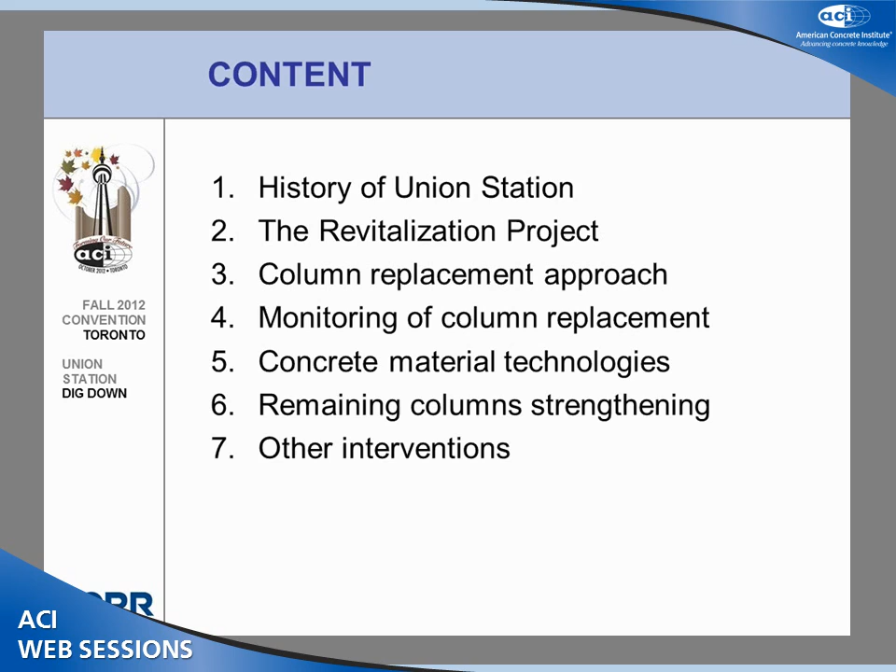I will be talking a little bit about the history of Union Station, and I will be talking about the project and what we are doing, and I will focus a little bit about the concrete material technologies that are involved.

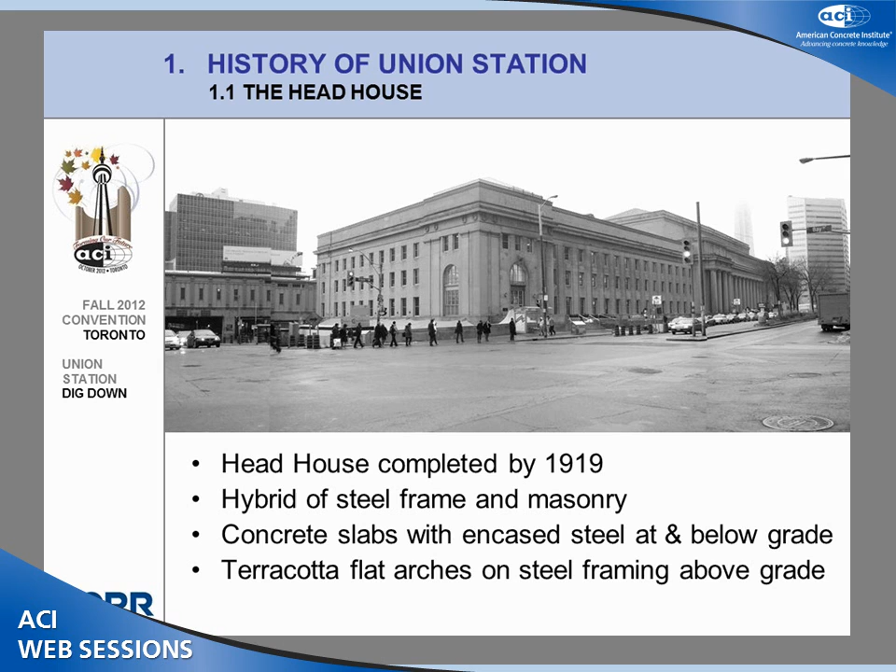What you are seeing is the head house of the Union Station. It was completed in 1919 as a fine example of the Beaux-Arts of the period. It is a hybrid steel frame and masonry that had concrete slabs on steel framing only in the ground floor and the basement. Above that, everything is composed of steel framing with flat terracotta arches.

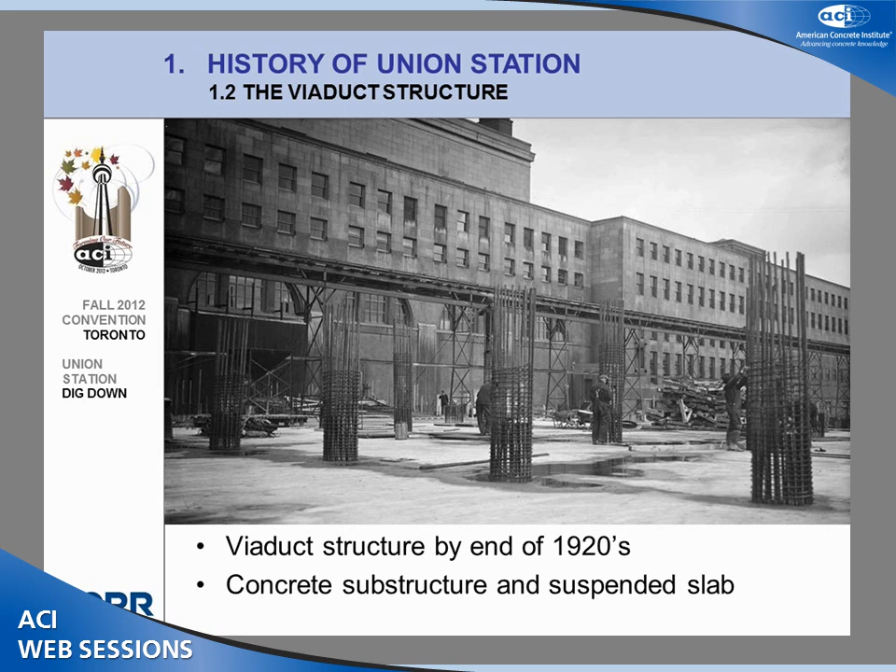Adjacent to this and just to the south of the building, which is the head house building, is a viaduct structure, which is primarily really a bridge that elevates the trains to the level of the concourse. This was built of a purely reinforced concrete structure. In fact, it was built almost 10 years after the completion of the head house, and that had to do with issues in decision making in the city of Toronto. Nothing that we have now, so this was only in the past, I guess.

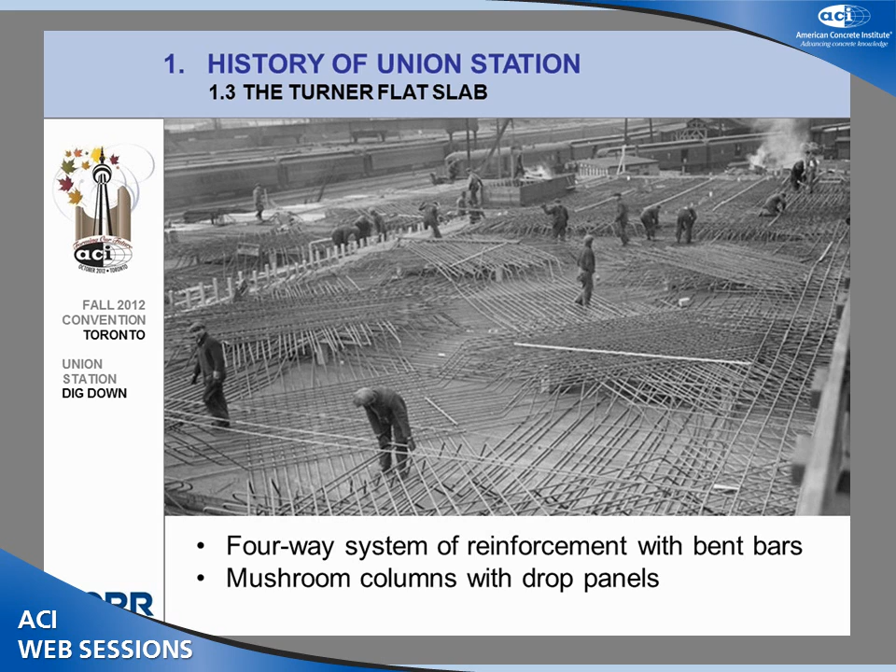The structure is a Turner flat slab, which has a four-way reinforcement system with bent bars, which are common of the period. It had mushroom columns and drop panels.

So the site is a heritage protected site and is one of the most significant buildings in Canada, in fact, in terms of its heritage values. We are doing a lot of work on the restoration of the building, but that's not the subject of today, so I will not be discussing that aspect of the project.

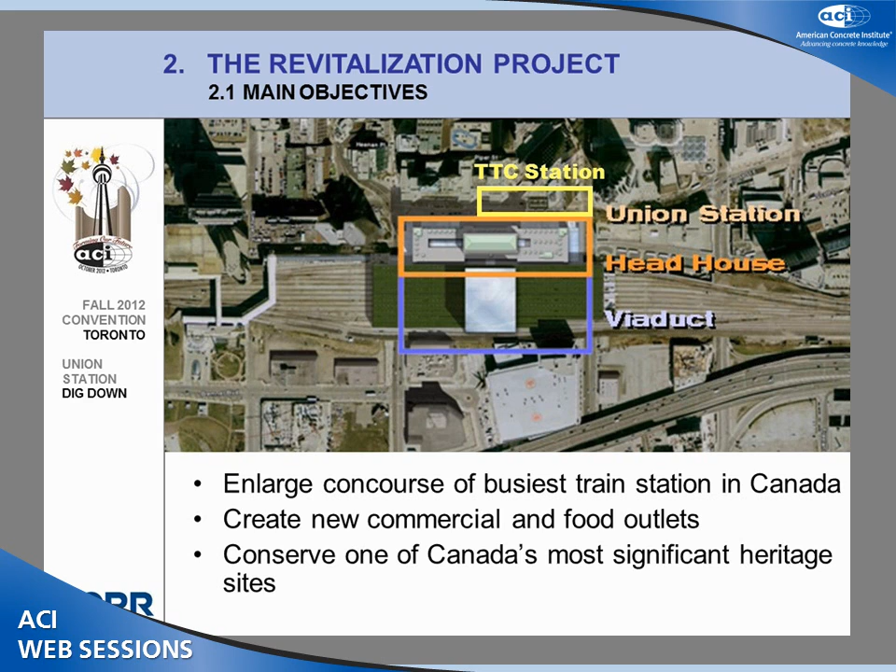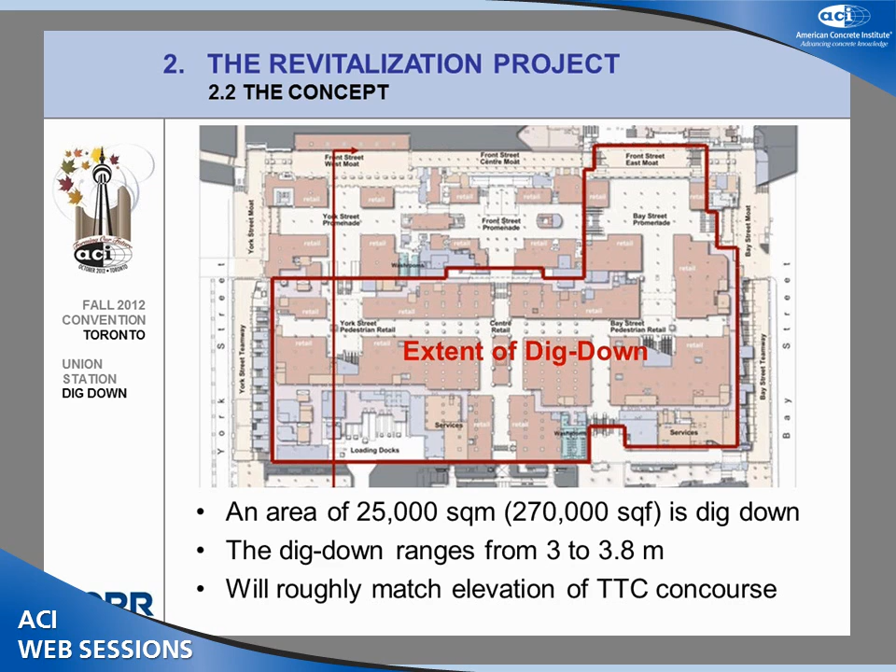What I'll be talking about is really the dig down, which you can see, which is basically the entire footprint of the viaduct structure, almost 240 meters long, as well as part of the head house that we are digging under, and the moat that surrounds the head house, and we will be at the same level as the reduced level of the entrance of the TTC station. So all in all, we'll be digging an area of approximately 25,000 square meters. Well, I'm talking in the past tense - in fact, the project is in earnest for a while, as you will be seeing.

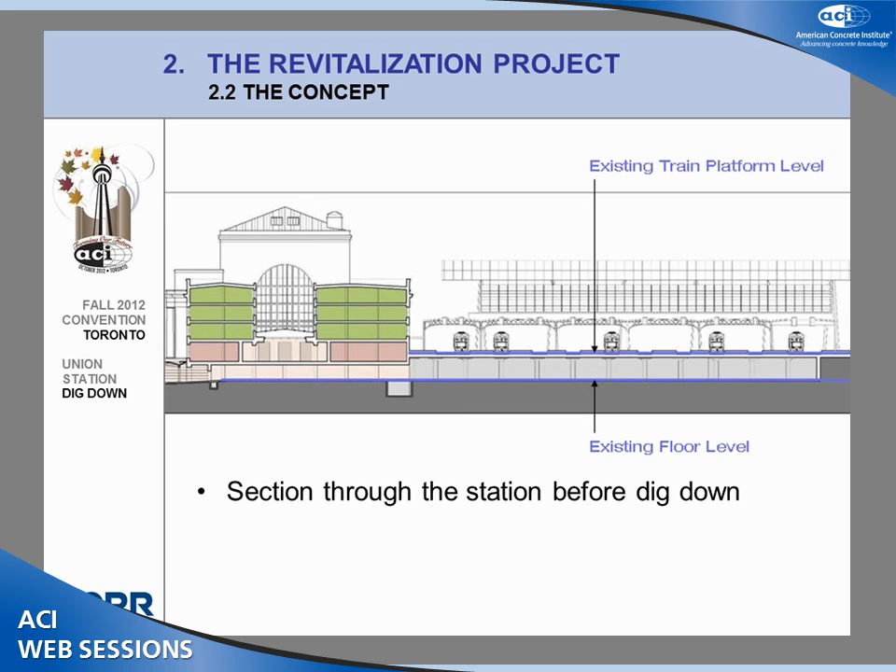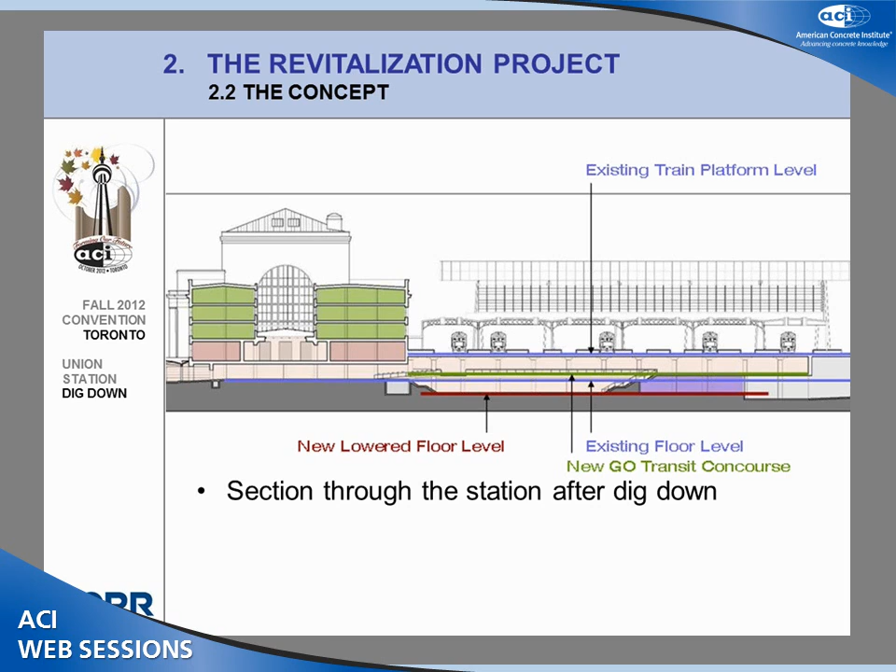This gives you an idea of a perspective in terms of a cross-section. The head house is to your left, the train shed is to your right, and underneath that is the viaduct structure. As we complete our project, we would have created a new retail mall below this structure, and we would have created a new concourse - really a new slab that would be sitting a little bit higher than where the current slab on grade is now.

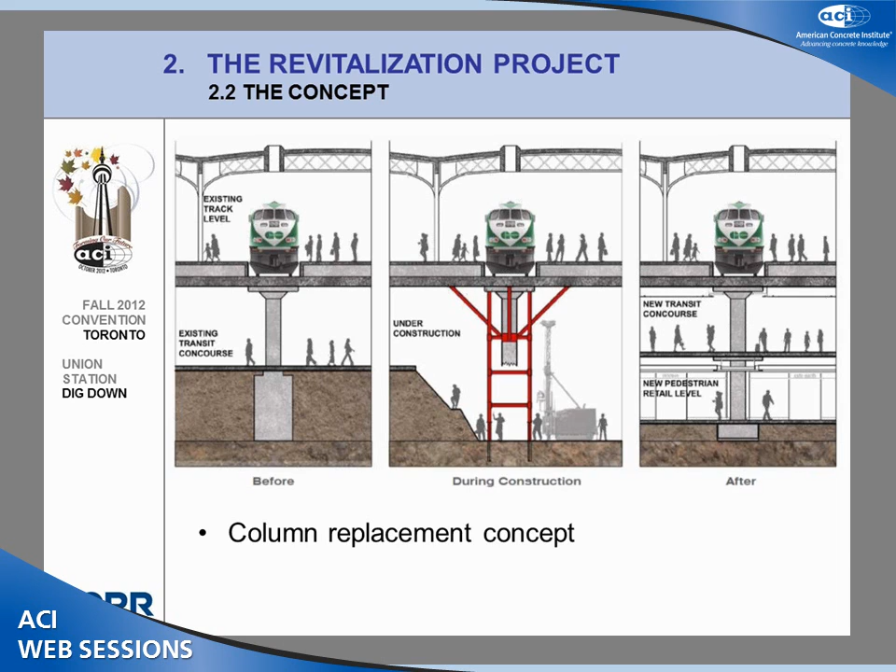The concept is explained in this slide. The situation before the intervention is that we have just this one concourse. We are going to be excavating, shoring the track slab, and then we're going to break the column, remove the foundation, and then cast a new column with its new foundation, and cast a new concourse slab.

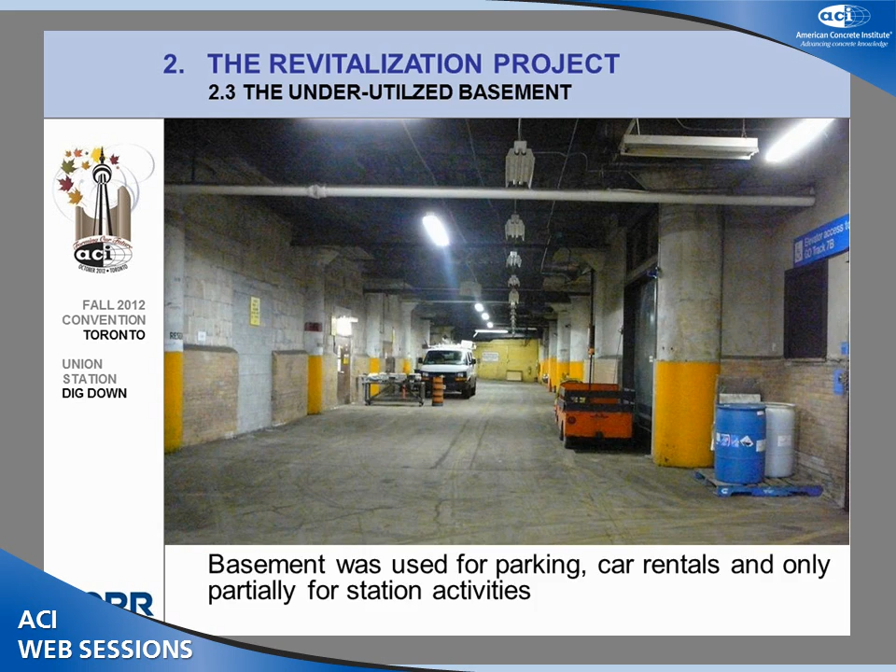The original viaduct structure was highly underutilized. There was some usage for it in terms of some car rentals and some maintenance, and a little bit of it was used by GO as part of the GO concourse, but that was even a very small part of the viaduct structure, so it was highly underutilized.

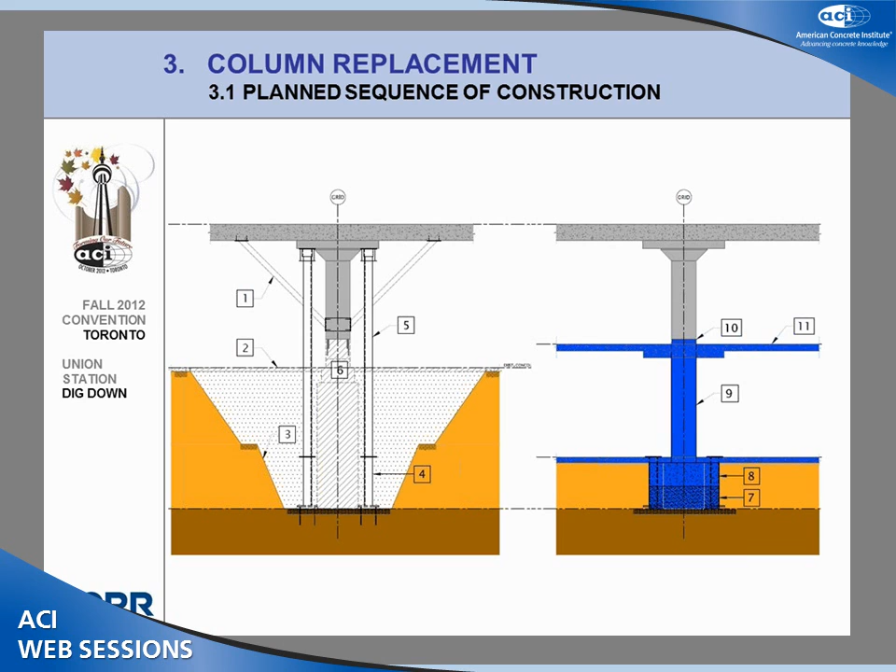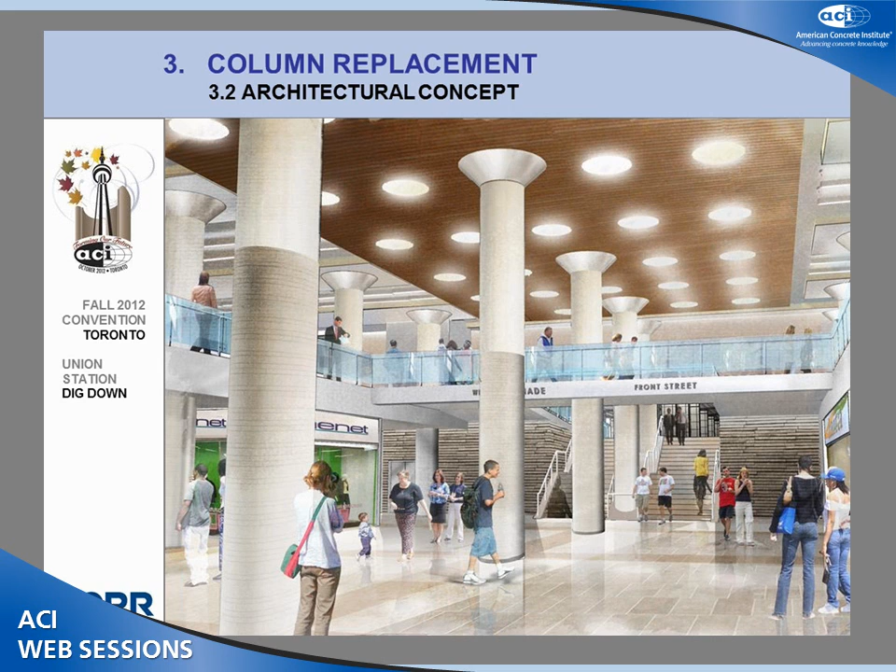This is again the same diagram, except it shows the sequence of what we are doing and how we are achieving it. I'll be going over this in a minute, so we'll see it as it's happening now. This is an artist's image of what we are expecting to see in a few years, planned in 2015. But you will see more of it before that, because it will open in stages.

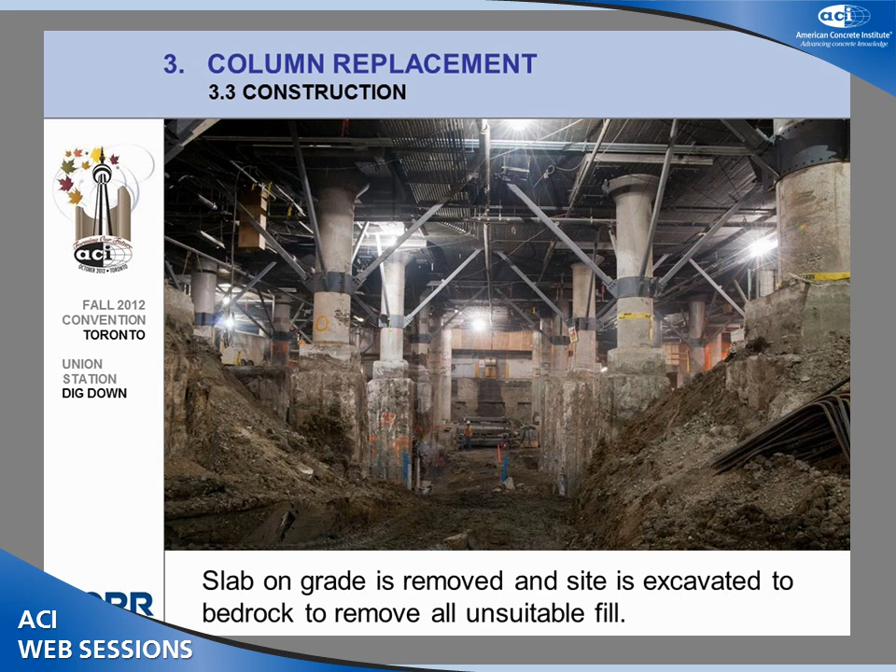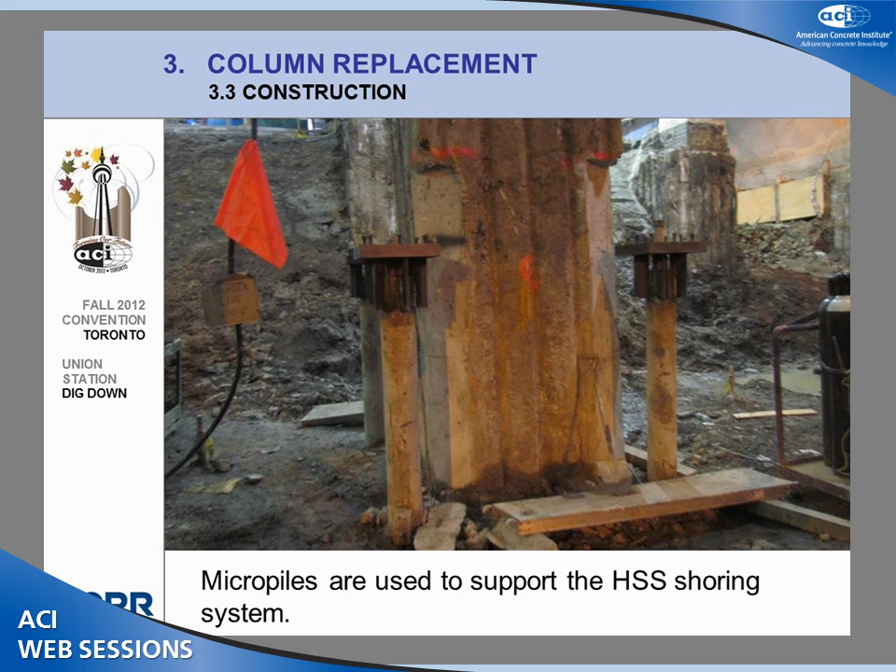This shows the dig down, which is basically the excavation, and you see these pedestal foundations that were supporting the track slab. To support the track slab, we had to support this on firm ground, and we supported the majority of those on micropiles columns that were socketed in rock.

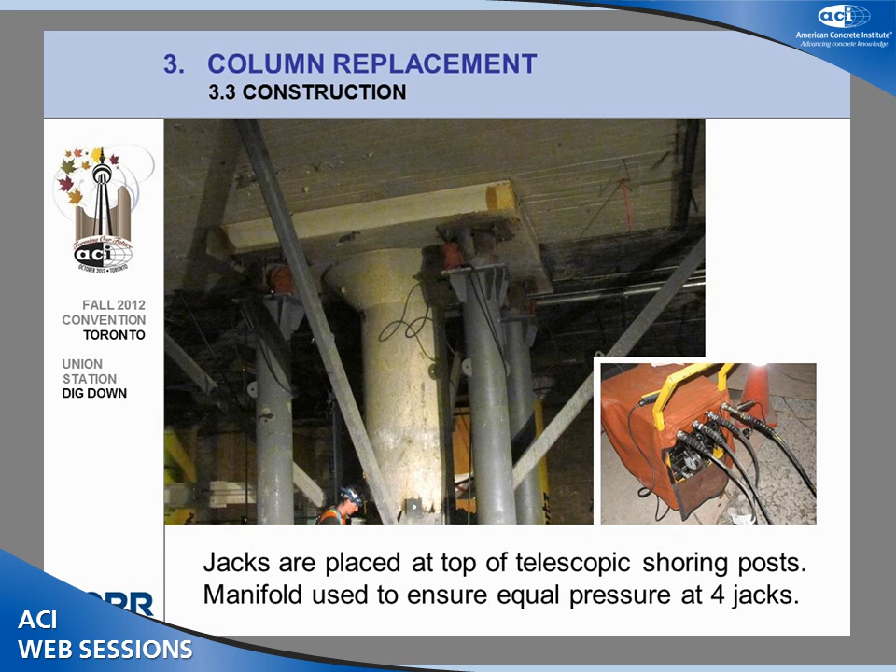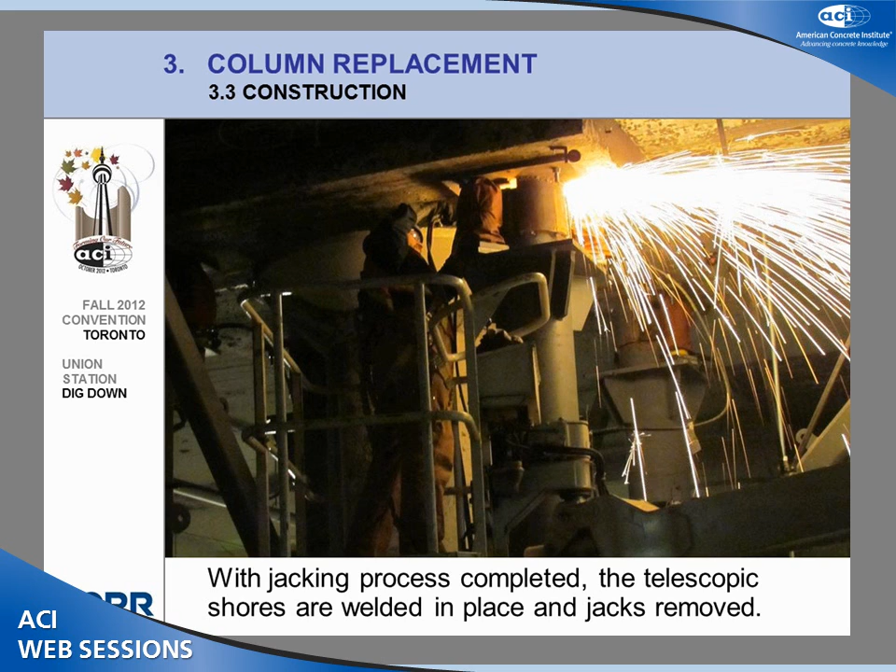As we mount these shoring posts, we introduce jacks, four jacks at the four corners of the column, and use a manifold system to make sure that the loading of the four corners of the column is uniform. There was a telescopic kind of post that we used, which had two shafts. Once the jacking is completed, welding would be performed so that the load is no longer on the hydraulic jacks, but rather on steel. Then the jacks can be removed temporarily until they are reinstated when we want to transfer the load back to the completed column.

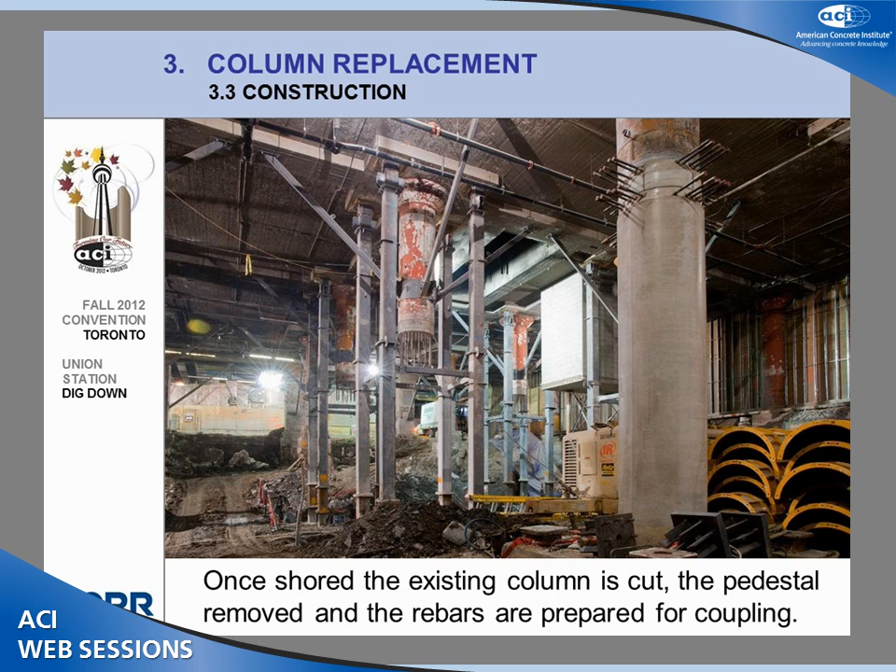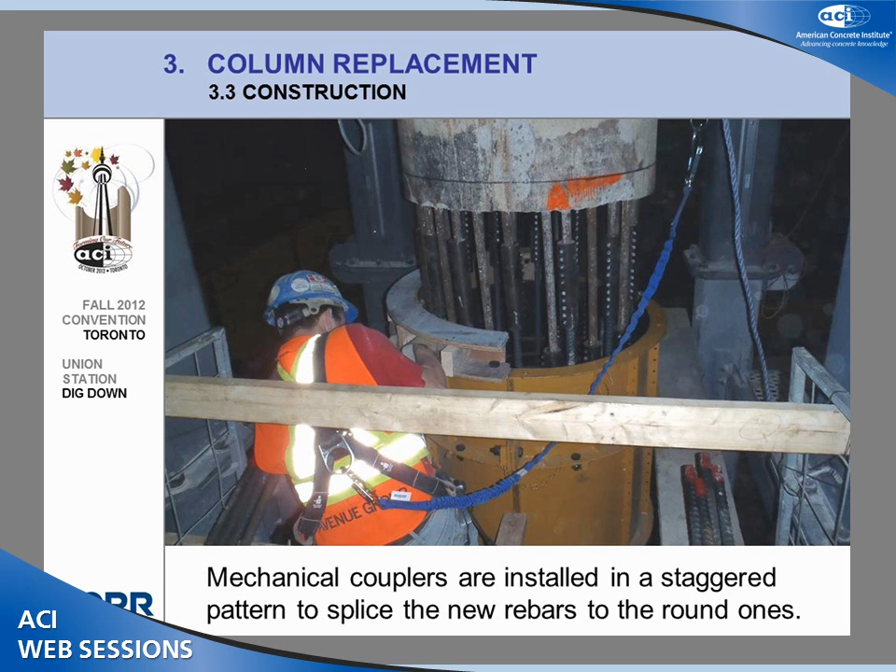This shows a snapshot of one column that has been cut, where the original rebars are exposed by chipping the concrete around. Couplers are introduced to connect the old round bars to the new deformed bars. We tested this to make sure it works, since these couplers are certainly not designed for the original round bars, so this was a different application. Indeed the failure happened in the steel round bars, not in the new steel bars, nor in the coupler itself.

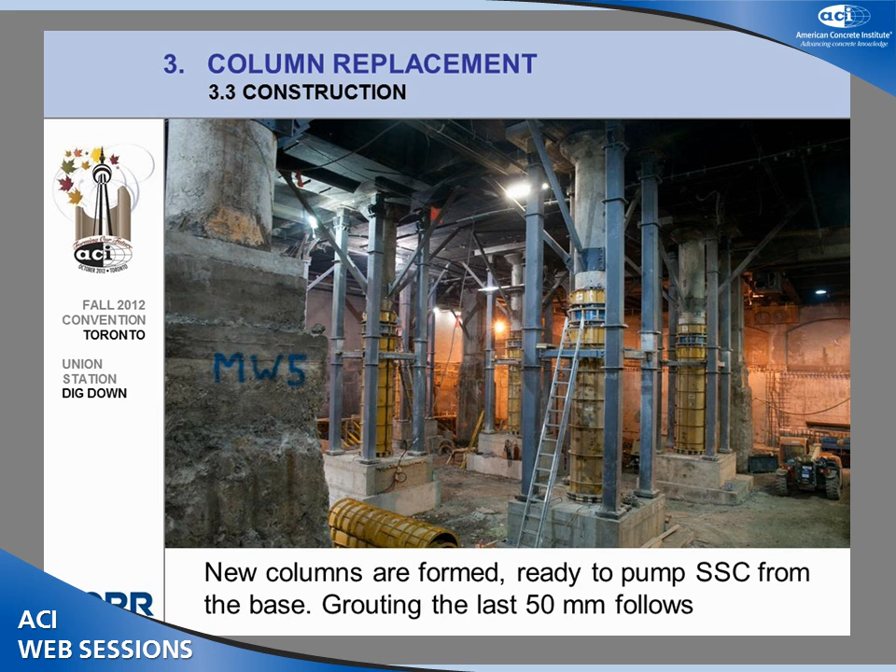This shows the formwork that's been done, and we would be pumping the concrete from below, done in two stages. The first stage is the majority of the column, and we just leave a 50 millimeter distance so that we can grout this, to make sure that we have a good part of the shrinkage that takes place along the length of the column before we grout with the shrinkage compensating grout.

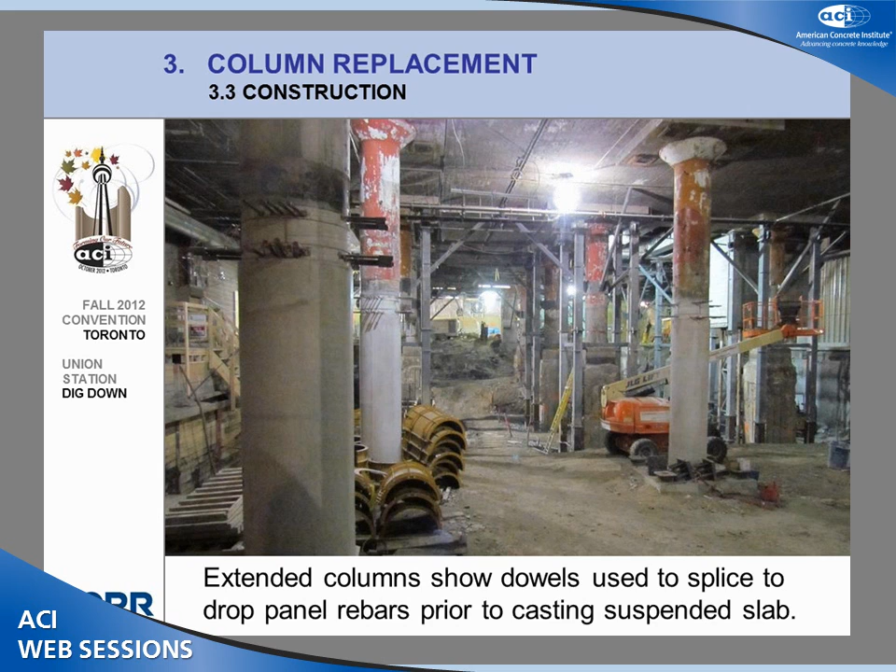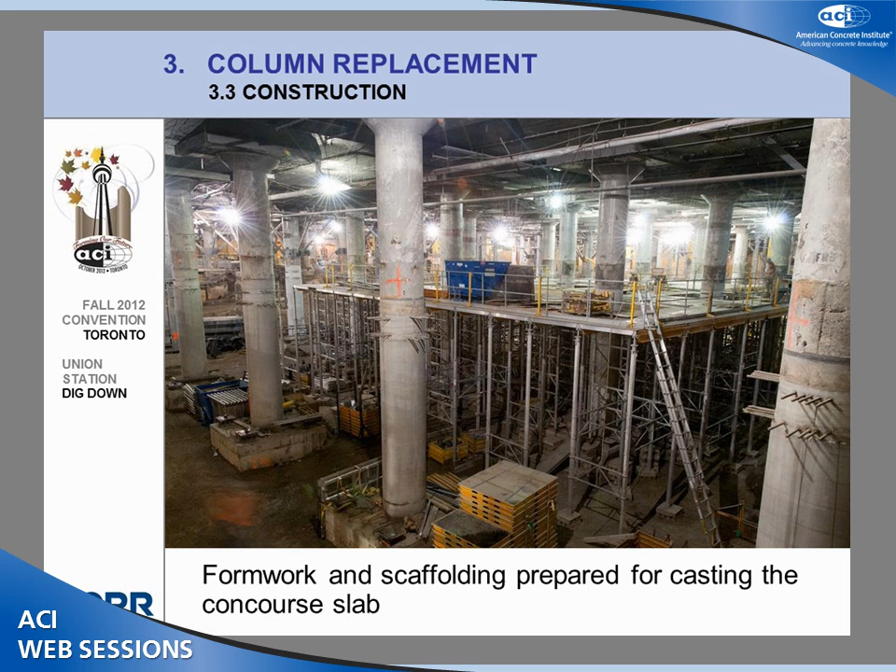This is an image of part of the completed columns, and as we then place the concourse slab formwork, you can see the dowels that are introduced in the columns with couplers that connect to the concourse slab reinforcement. This is the concourse slab as cast from below.

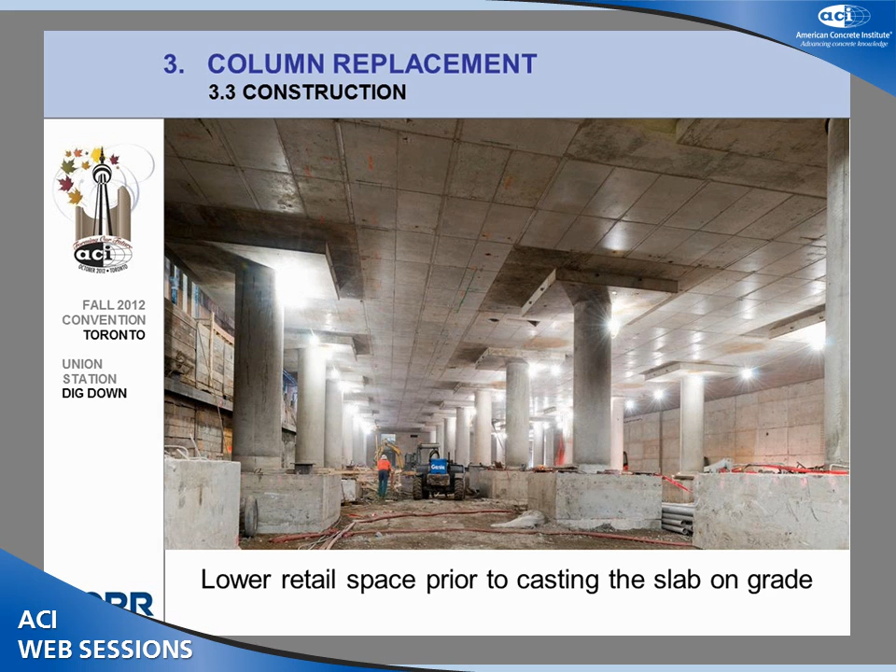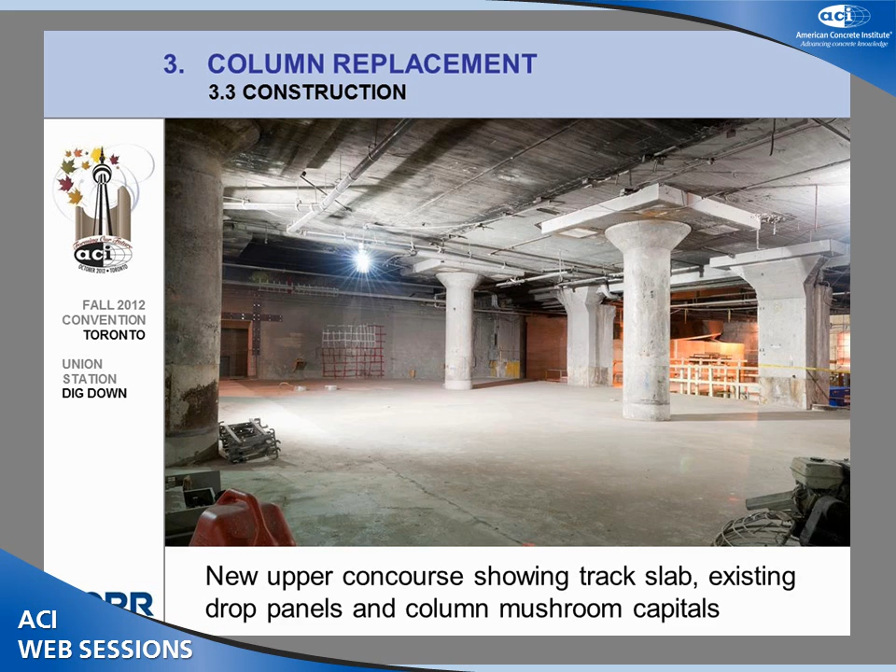We used the same system more or less that was used, except we did not use the column capitals, but had a flat slab with drop panels, and of course the slab on grade is still on top of the level of the foundations which you see. This is the concourse slab as seen from above, and it shows the original track slab with its mushroom capital and the drop panels.

We were asked that the train station had to be fully operational. There was no stoppage whatsoever, not even for the trial columns that we did at the beginning.

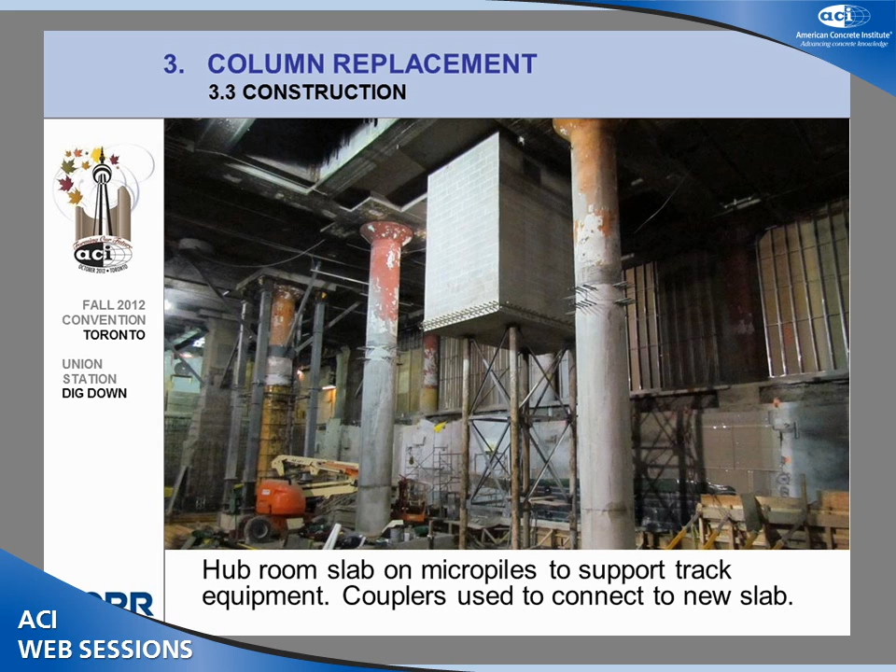Part of running the train station is all of the equipment, and we were asked to produce a room that would house the equipment and not have it removed at any time. So what we did is cast a slab on micropiles, then dug down below that slab, braced those micropiles, and had a platform waiting with all of the coupling, the couplers on those dowels to receive the rebars for the Concourse at that level.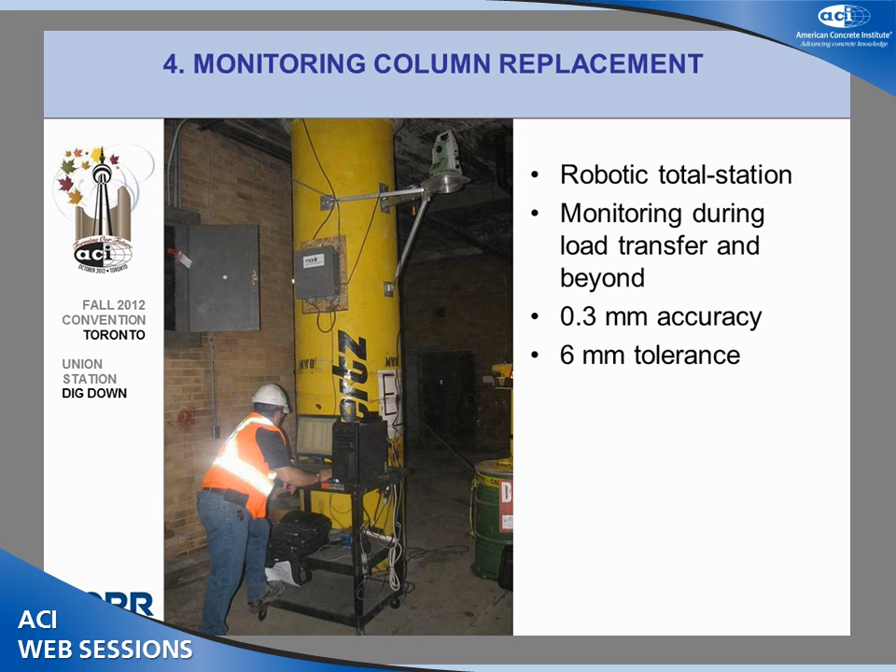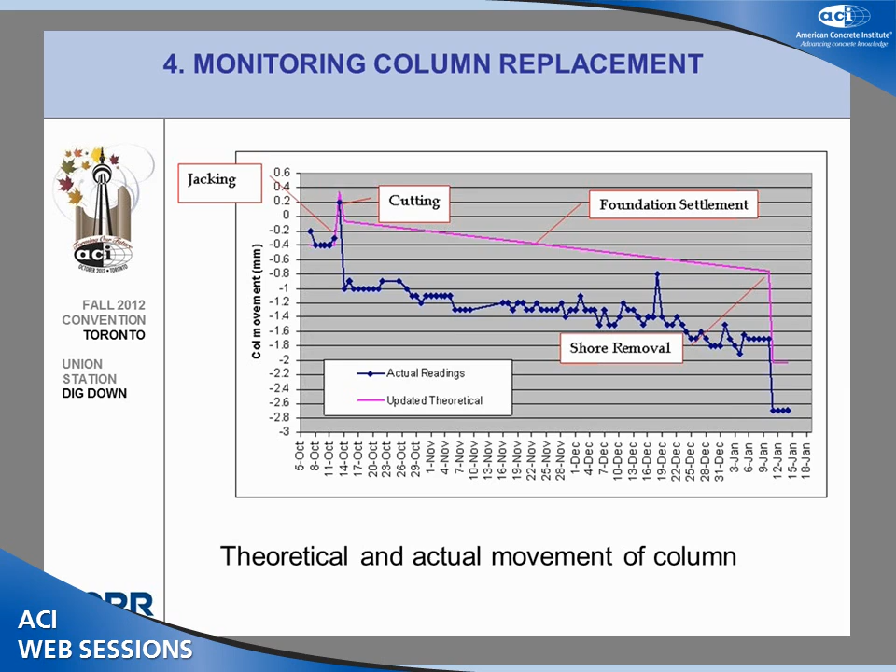We monitored the movement throughout, and required an accuracy of 0.3 millimeters and a tolerance of 6 millimeters. This is an example of the monitoring done by a robotic total station, where the movement roughly stayed within 3 millimeters, not really the 6 millimeters, which was the higher limit we had set.

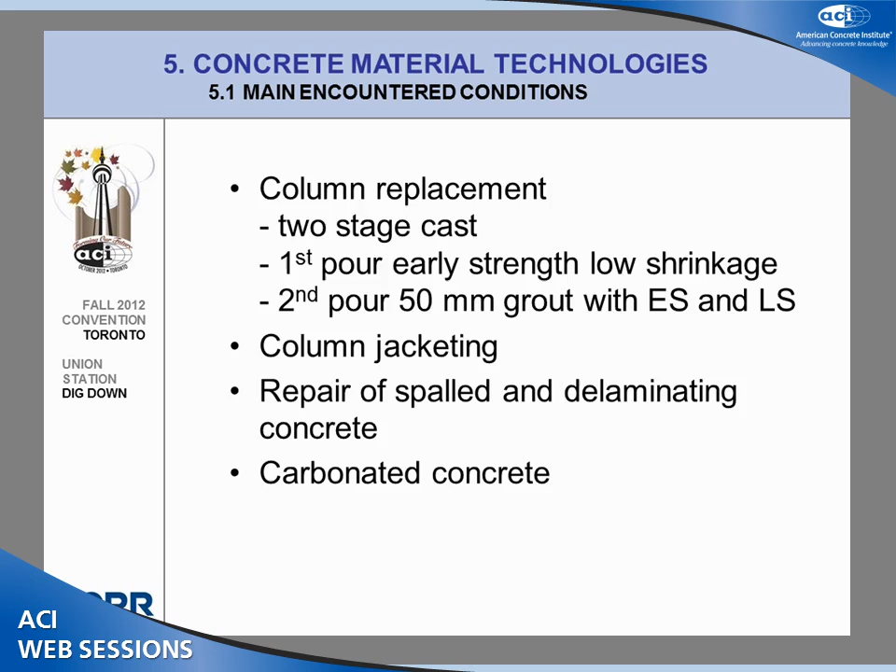As I said, there were two pours, and I'll talk a little bit about the concrete mixes that were used. There were other applications such as column jacketing and repair of spalled, delaminated, and carbonated concrete. Again, this is not the subject of this presentation, so I will only touch upon the main subject, which is the column replacement.

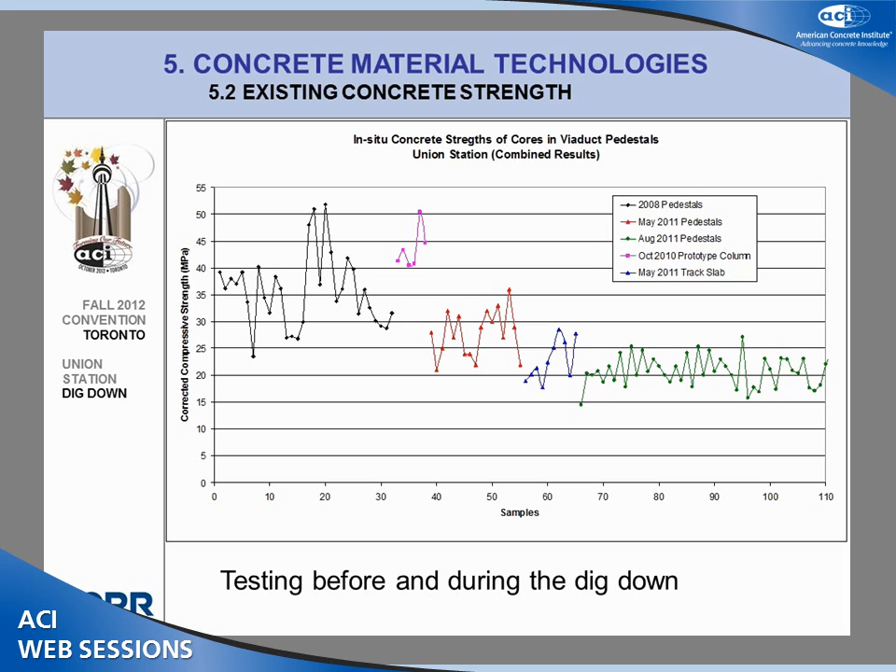Part of the evaluation is that we tested the concrete before we started, and then tested some of the concrete we retrieved from site as we proceeded. It is interesting to note that the concrete was on the whole significantly higher than what was specified originally, and one explanation was that perhaps the granular size of the cement at the time allowed a progressive curing for a longer period, so we had this growth of concrete.

Now, basically, we had specified... sorry, this is just to talk about the same point I made, that the concrete strength was significantly higher.

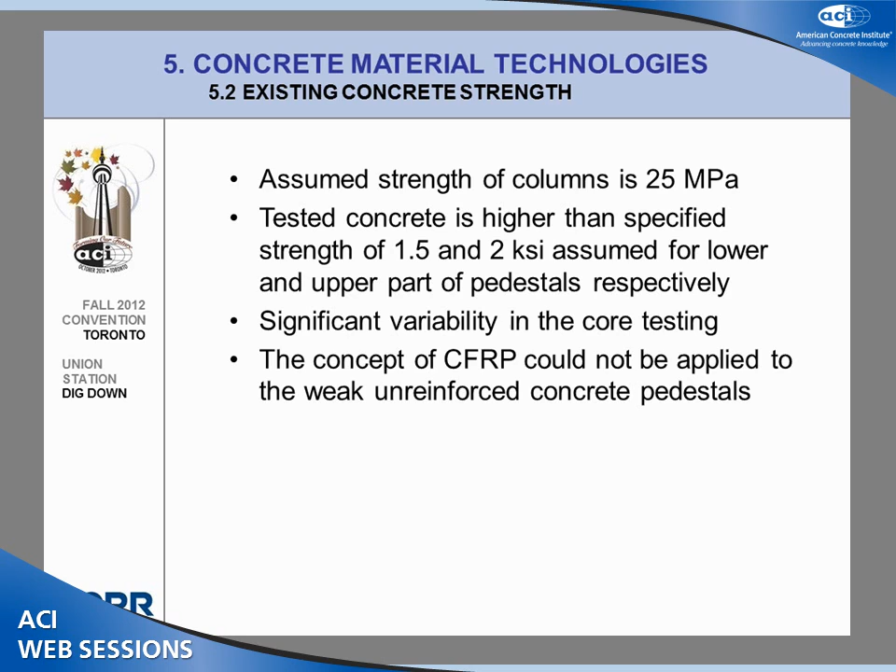We did have to change course on some of the reinforcing of some of the pedestals where we had specified carbon fibers. The concrete in those pedestals turned out to be less than what we had tested originally, so we reverted to reinforced jacketing. Basically, the mix design was dictated by the fact that we had congestion in the reinforcement, particularly at the splice.

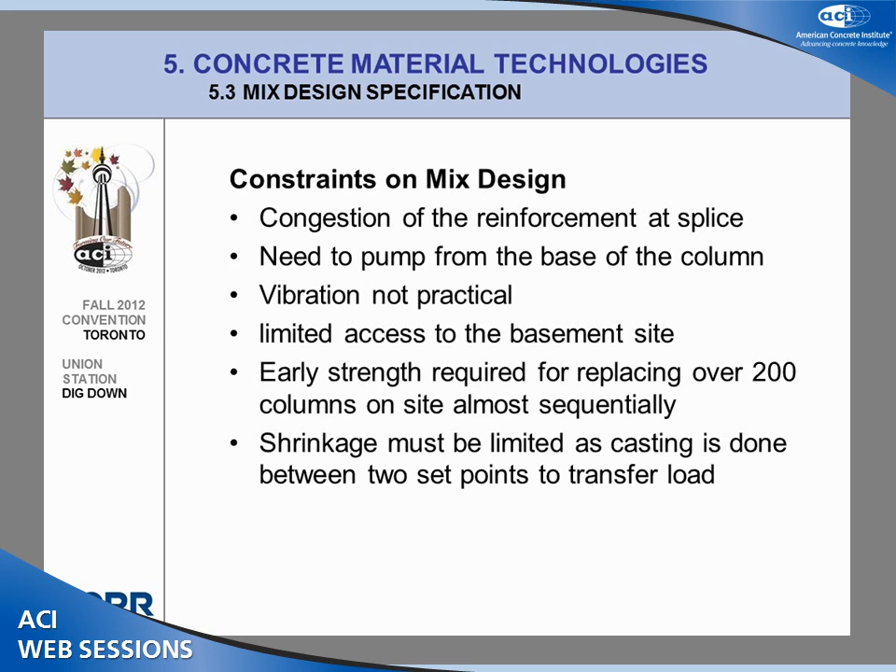We needed to pump the concrete. We did not have the luxury of doing vibration, so we wanted self-consolidating concrete, which was the answer to all of this. We also wanted early strength because we were doing the columns sequentially and didn't want this to take 10 years, so we wanted to expedite the process - there was a limit to how long we could keep the columns jacked before moving to the next column. We wanted to limit the shrinkage so we limit the amount of movement in the slab, which was a critical issue.

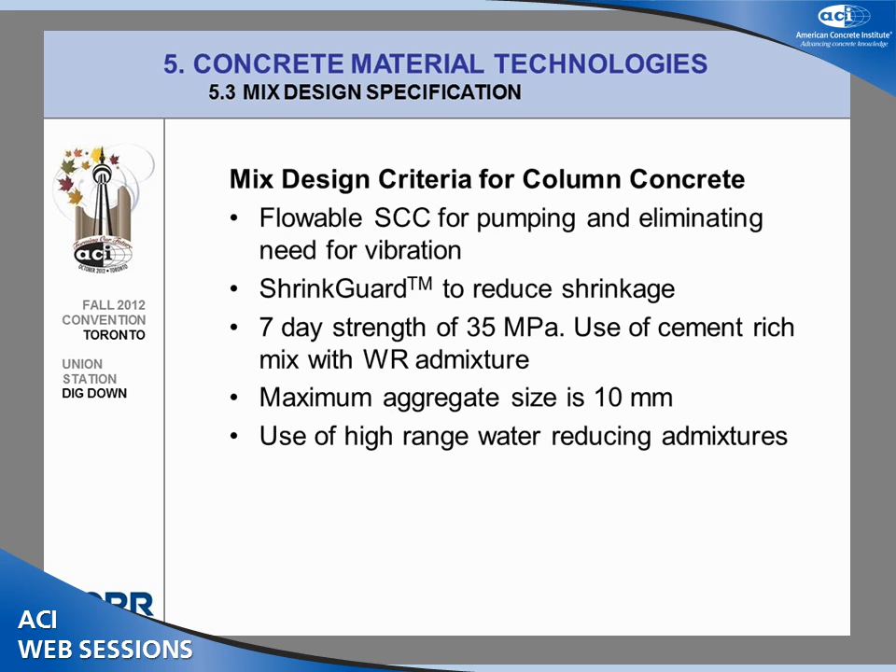So we used flowable self-consolidating concrete. We used ShrinkGuard to reduce shrinkage, and specified a 7-day strength of 35 and a 10 millimeter maximum aggregate size, and we used high range water reducing admixtures.

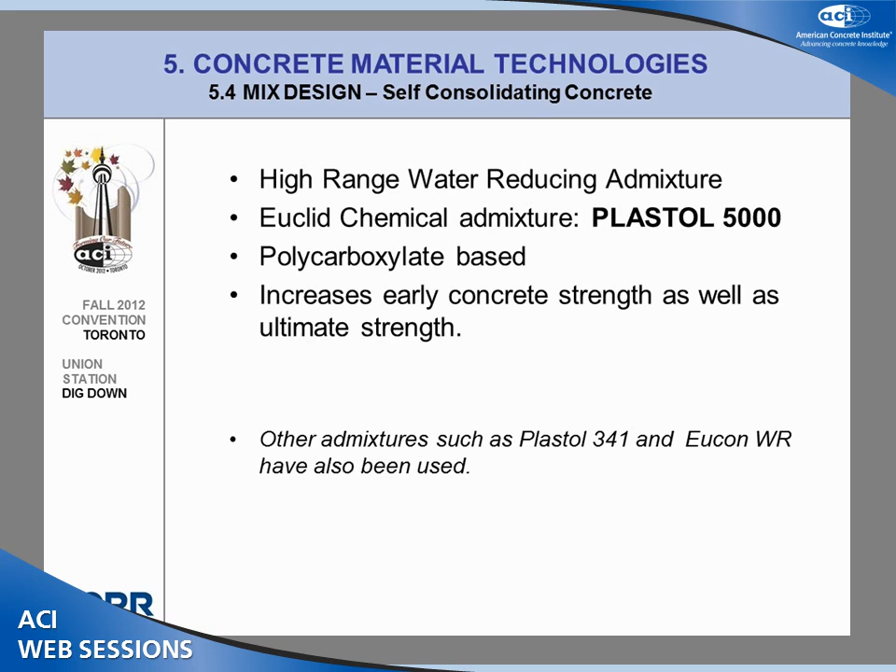Basically, in terms of the self-consolidating concrete, we used a product by Euclid as a super plasticizer. Then there was the shrinkage aspect, with a product primarily by Grace, which claimed reduction of shrinkage by up to 50%.

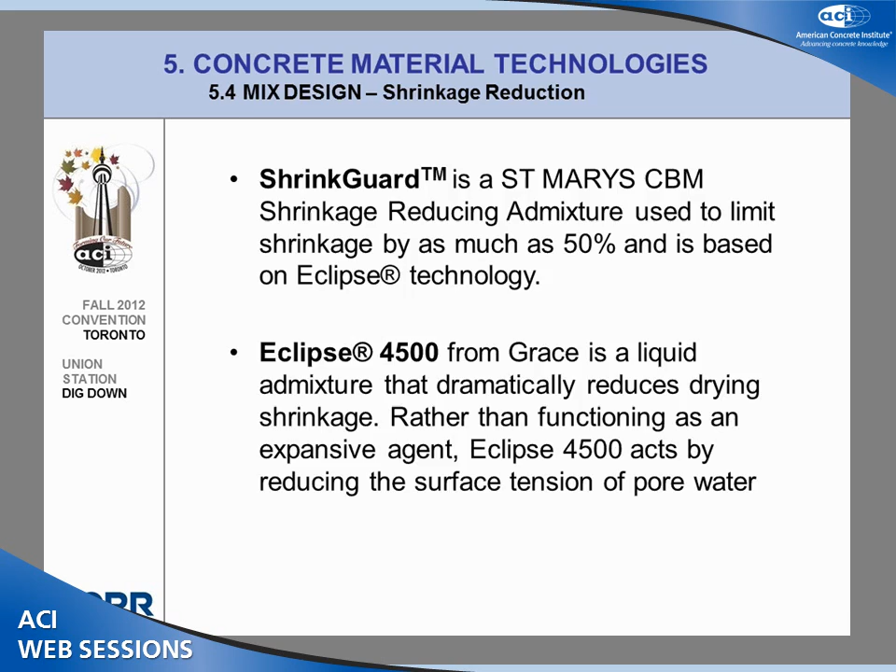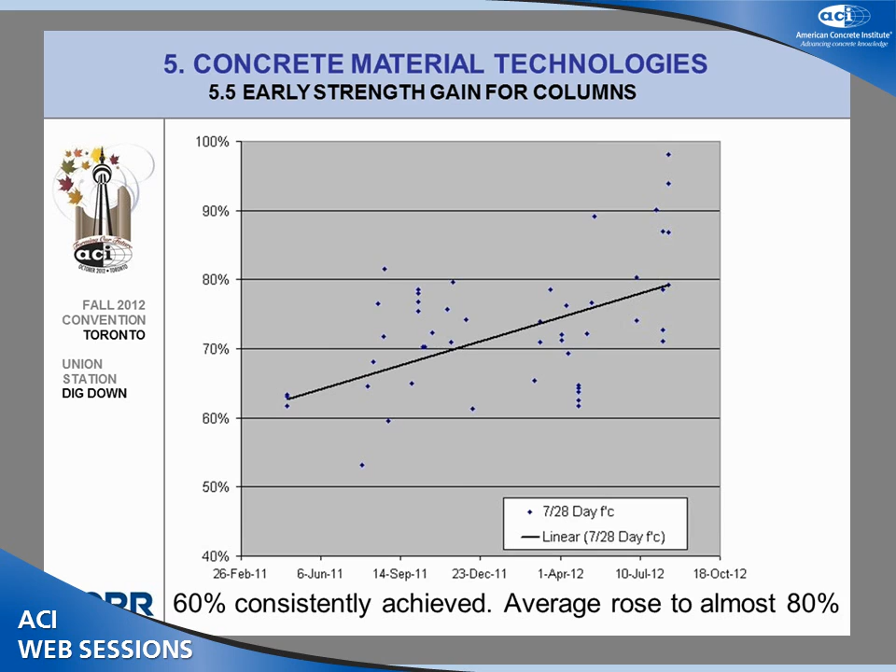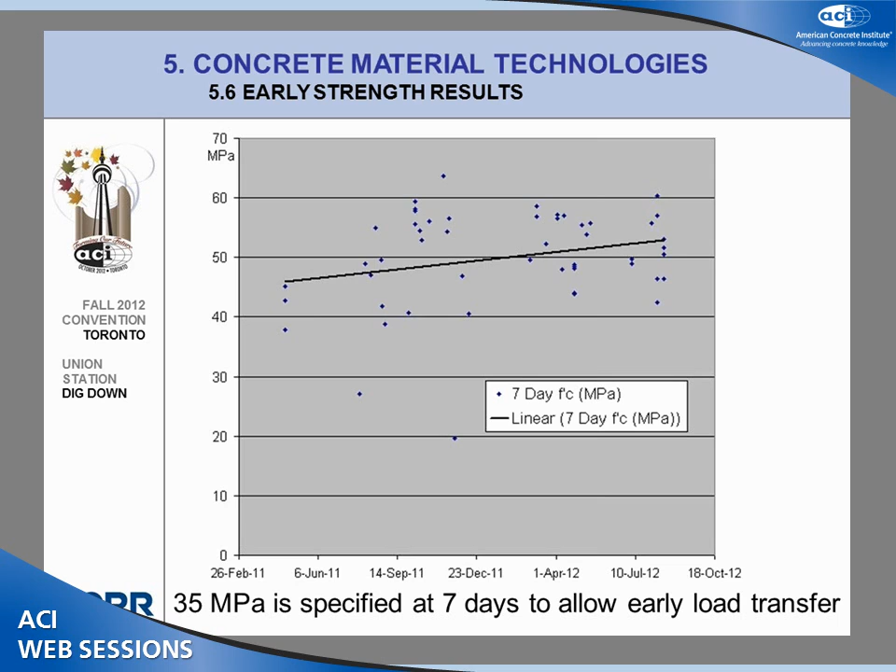We consistently got the required 35 MPa. However, we improved on the 7 to 28 day ratio, statistically at least. This is the results of the 7-day strength, where we are almost always exceeding the 35 MPa.

The top part, which is the top wall at 50 millimeters, was a Sika grout, which had a 2-stage shrinkage compensating mechanism. The original had a different kind of mechanism for reduction of shrinkage by limiting the surface tension in the pores of the concrete.

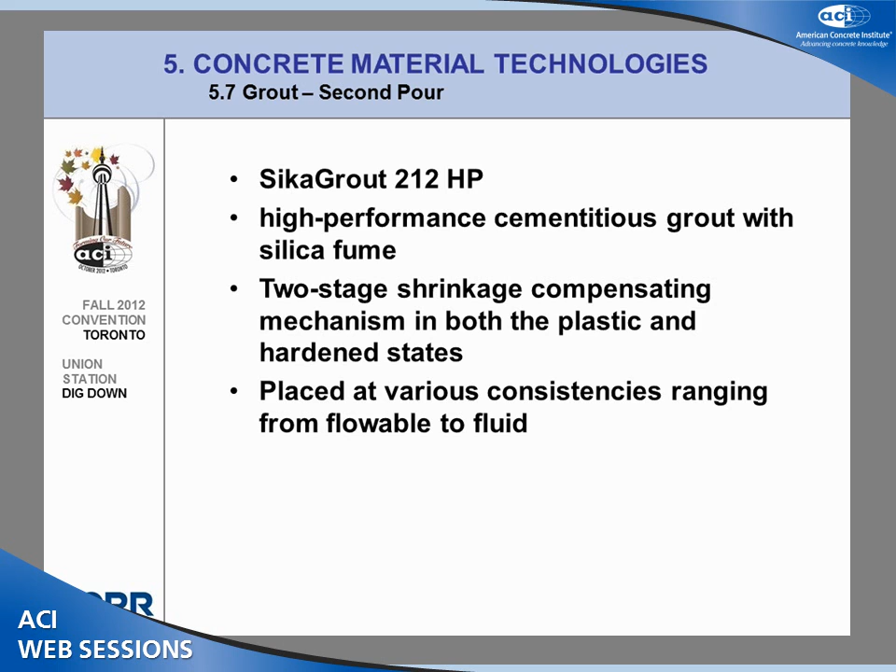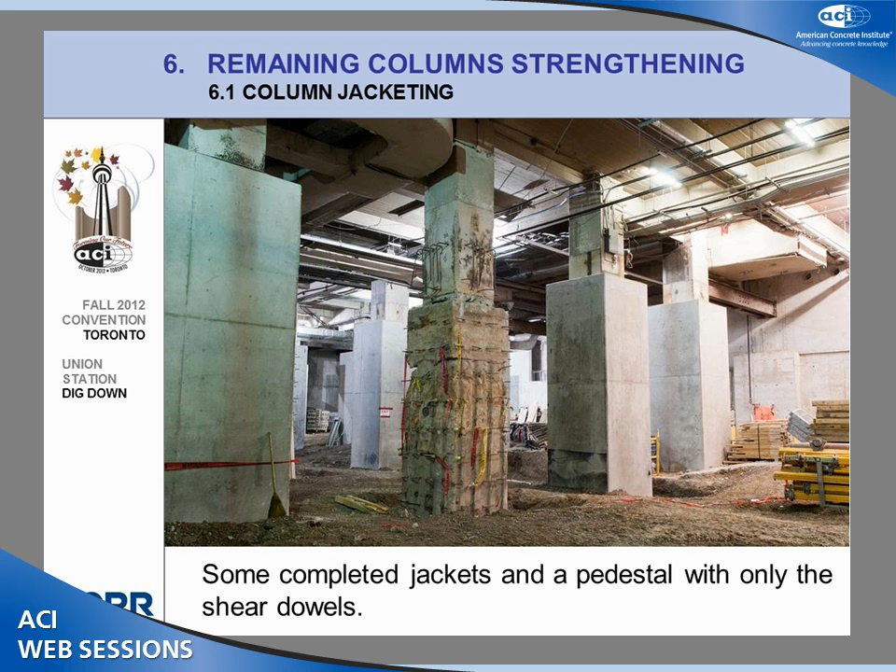That was what was used for the column as a whole. This was what was used for the last 50 millimeters. This is the jacketing that we had used, and we used carbon fiber for the columns at the top where we had predictable concrete strength.

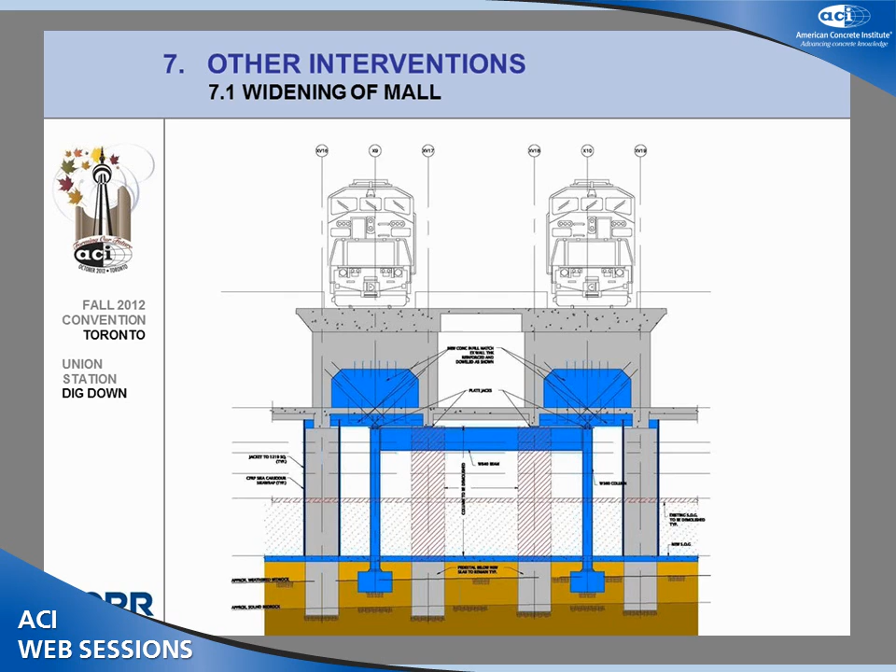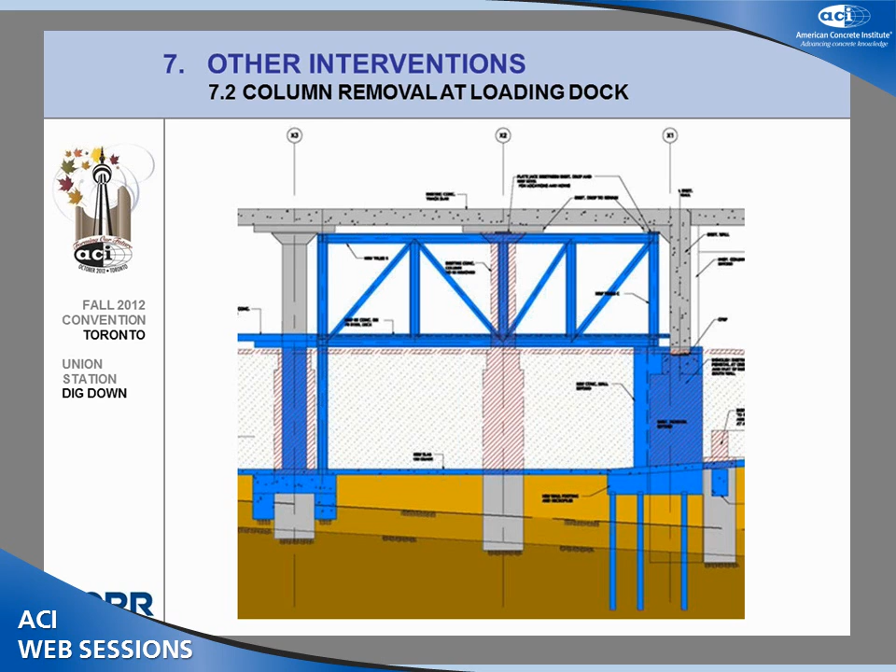We had other applications such as widening of the mall by complete removal of columns and replacement by steel framing. And then we had one case where we removed the columns entirely to create a larger loading dock, replacing that with a story-high steel truss.

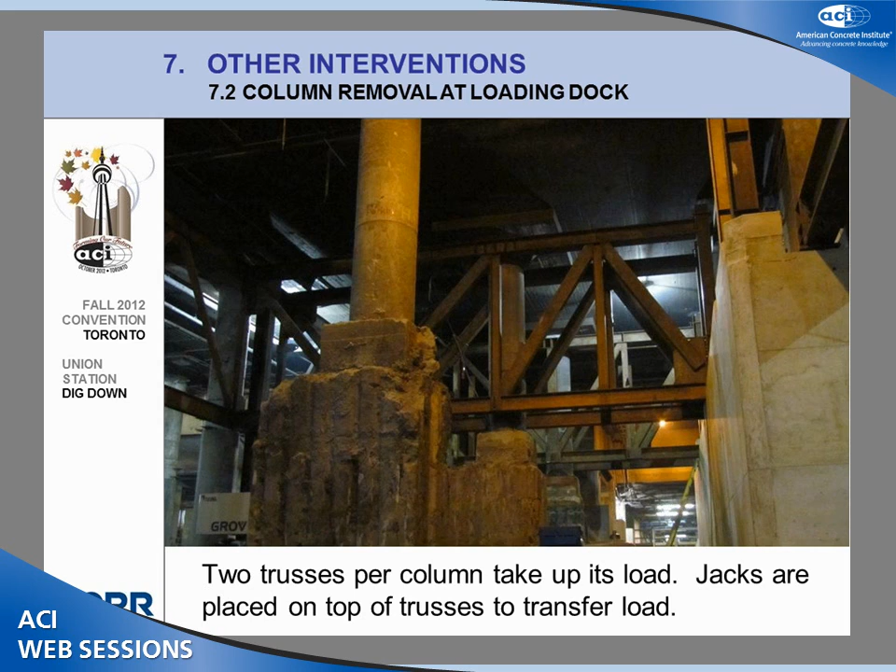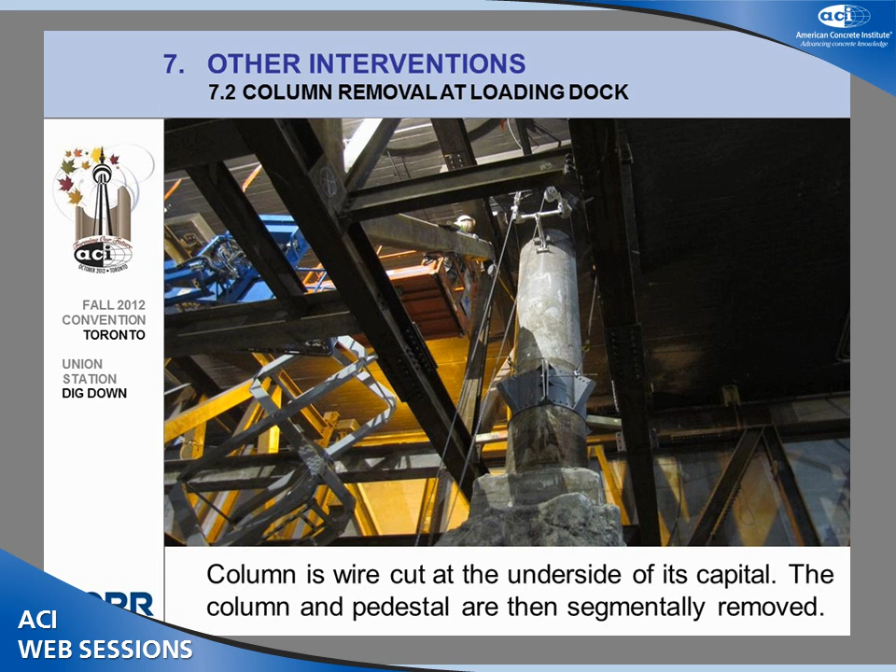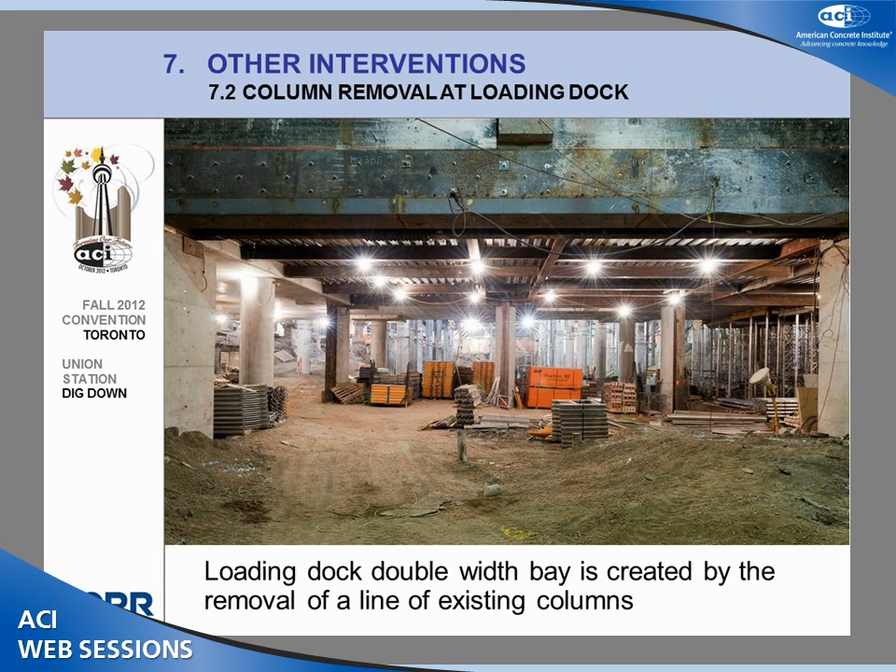This is the steel truss in position, and you can see two trusses surrounding any one column. Then we would jack the load onto the truss, break the column by wire cutting it at the capital, and as you can see here, this is the column that has been removed segmentally after that, creating space below, which is column free.

And these trusses were then embedded in the partitions and the concourse above. And that's my presentation. If there are any questions.